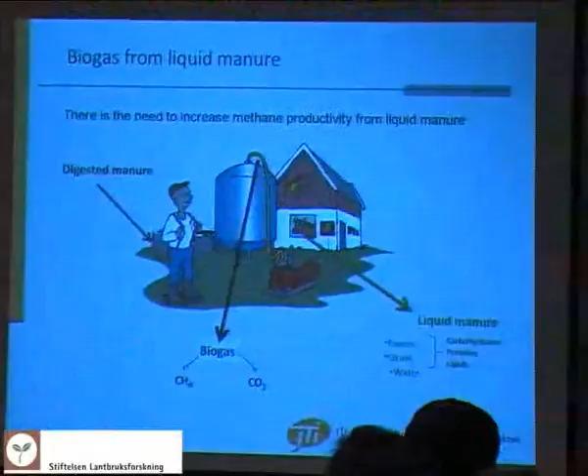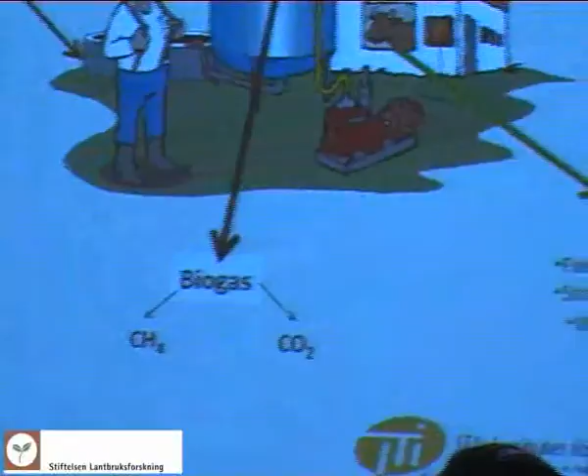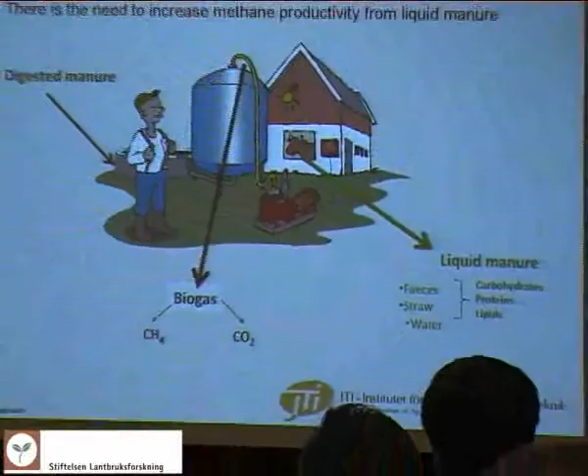Liquid manure consists of a mixture of feces, straw from bedding material, and water. The methane potential from liquid manure comes mainly from digestion of the organic material coming from the feces and from the straw.

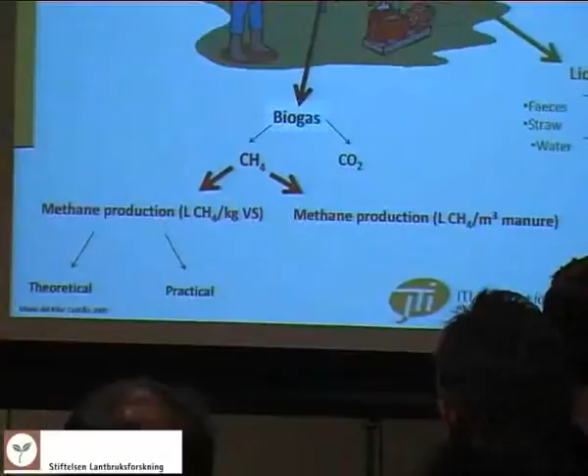When we talk about productivity, we mean the amount of methane we can produce from the manure. We can express this productivity in several ways: as liters of methane per cubic meter of manure in a volumetric way, or as methane production per kilo of volatile solid, which is an expression of organic material.

This methane production per kilo of VS can be calculated in two different ways: theoretical and practical. The theoretical way is based on the composition of the manure—mainly how much carbohydrates, proteins, and lipids we have. In turn, we can calculate how much carbon, hydrogen, and oxygen we have, and by using the Buswell formula, we can calculate the amount of methane that can be produced, assuming all the organic material has been converted into methane.

Then we have the practical methane production, which is done at the lab. We incubate the samples, liquid manure or some other substrate, and calculate how much methane is produced in reality.

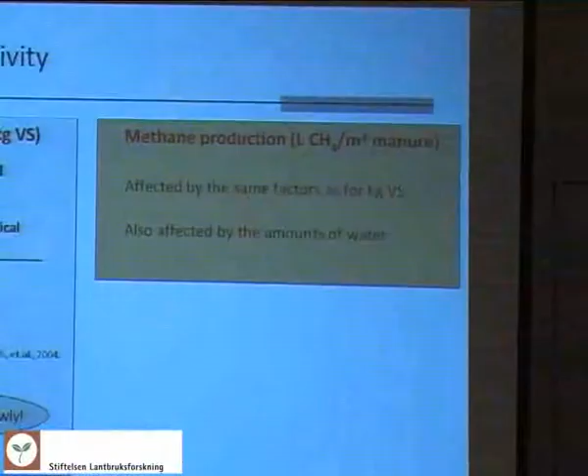What we always see is that the theoretical way of calculating methane is always higher than the practical. That's okay, because not all the carbon from the manure or substrate goes toward production of methane. Some carbon goes toward synthesis of microbial biomass, for example. Some carbon can also be lost in the effluent, and an important part of the carbon is probably not converted to methane because there is a lot of material that is very slowly degraded.

For example, lignocellulose material, especially if we have straw. This is because of the crystallinity of the cellulose structure, or it could also be because lignin is binding cellulose and hemicellulose, making them unavailable to microorganisms.

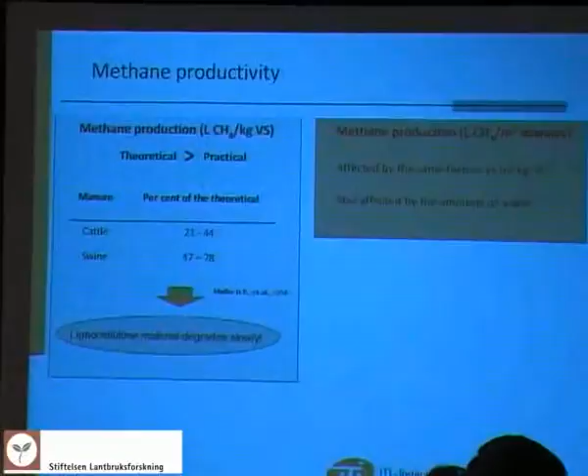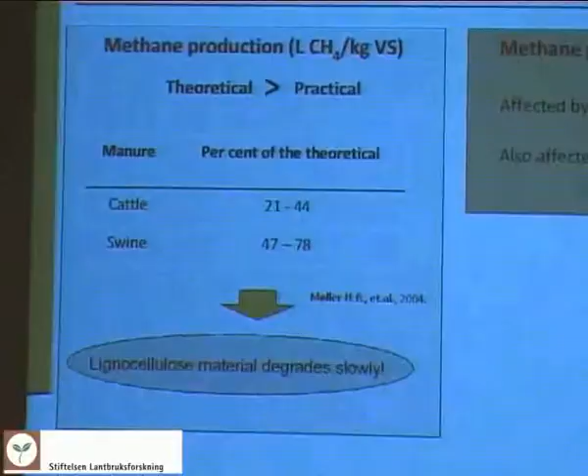We can see, for example, that cattle and swine manure's practical value is very low compared to the theoretical value, and it is especially lower in cattle. This is some data we got from a recent publication in 2004. It's mainly because cattle manure has a higher amount of straw than swine manure, which contains more lipids and protein.

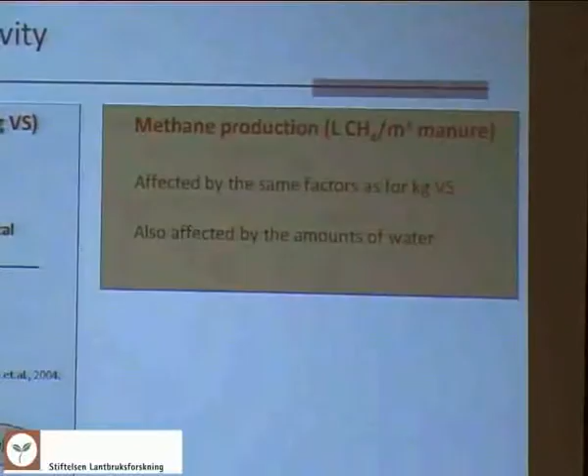In the case of methane production in a volumetric way, this expression is also affected by the same factors as for kilo VS, but it is also affected by the amount of water. So more water means a more diluted substrate, which means less methane per cubic meter.

The problem with liquid manure is that we have these two factors affecting methane production: we have slow degradable substances, and we also have very diluted solid, total solid.

What to do then in order to increase methane production? There are several ways of trying to increase methane production. If we have a material that is slowly degraded, then applying longer retention times can help us achieve increased production of methane.

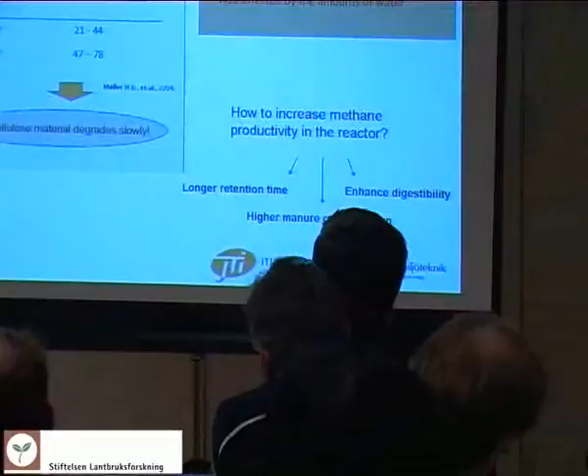If the problem is also the structure of the substrate, the availability of the carbon, then we can probably also enhance the digestibility in some way. On the other hand, if we have a too diluted substrate, then what becomes important is having a higher manure concentration.

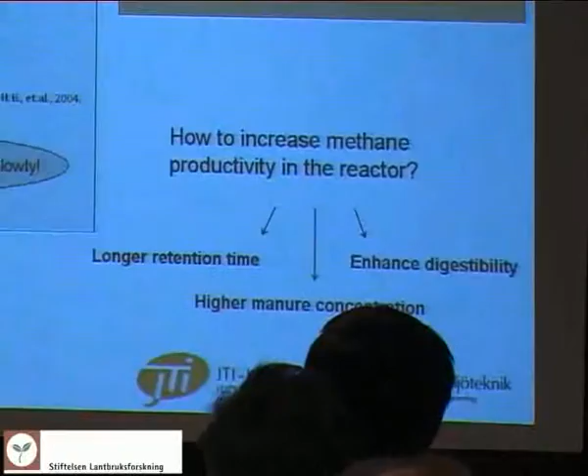What we did at the beginning is look at how other groups or countries were addressing this problem of liquid manure. We got some information from Germany, for example. They are addressing the problem by applying longer retention time.

One way of doing it is by having two serial connected reactors. The first step, or first reactor, is a conventional reactor, and the effluent from the first one goes directly into the second one. In that way, they are just increasing the retention time.

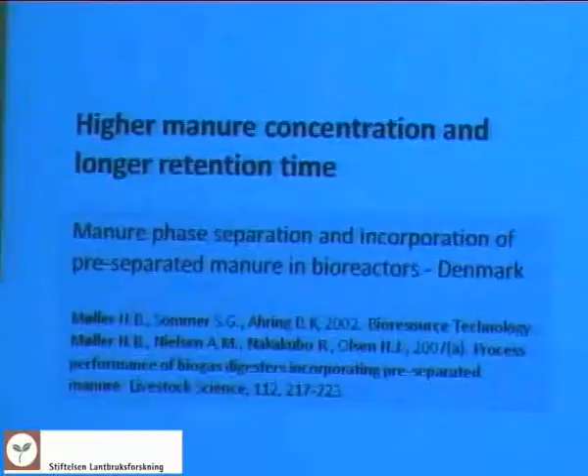In Denmark, for example, they are addressing the problem with trials to increase the concentration of manure. What they do is mix the liquid manure with pre-separated manure after dewatering, which increases the manure concentration and the total solids in the reactor.

They are also applying or making studies about the effect of longer retention times, and have seen that longer retention times are increasing the productivity of methane.

In Denmark, they are also making studies about enhancing the digestibility of the lignocellulose material by applying an alkaline treatment.

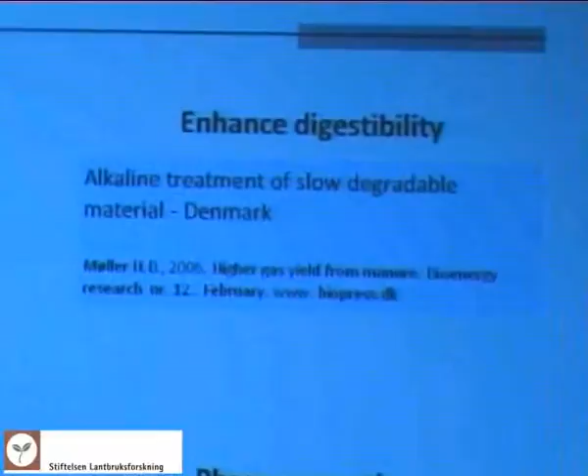If we focus again on having higher manure concentration, it means we need to separate phases—solid and liquid—and apply some kind of technique to achieve that separation.

In Denmark, for example, they have been trying centrifugation or evaporation or sedimentation, also with the help of polymers. We also have some experience here in Sweden with sedimentation of digestate.

So with all of this information, and taking into account all of these results, we established our hypothesis: biogas production from liquid manure can be enhanced in a two-serial connected reactor system.

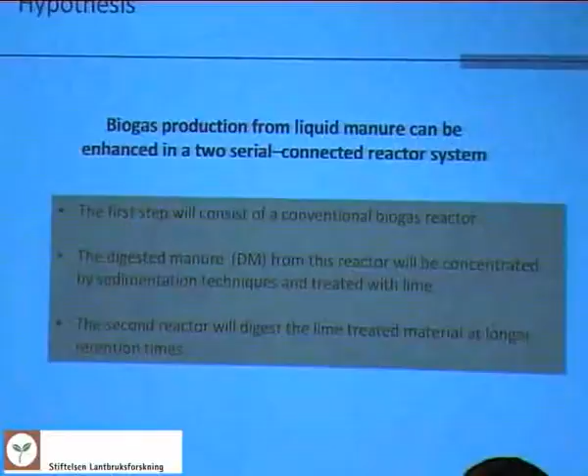In the first step, as in the German approach, we will have a conventional biogas reactor. The digested manure from this reactor will be concentrated by sedimentation and treated with lime, then transported or loaded into the second reactor, where we will apply longer retention times. So we are taking into account all the experiences in Denmark, Germany, and Sweden.